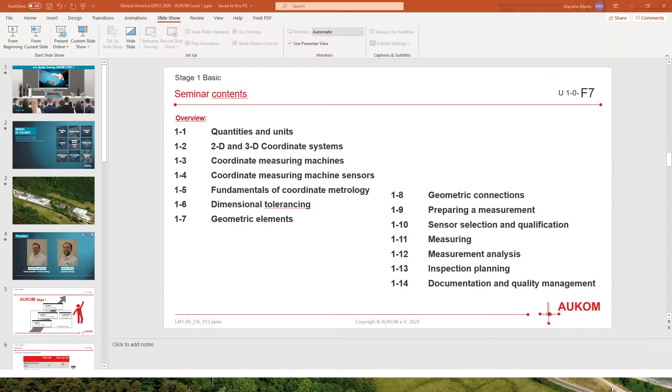Okay, here in this slide is probably the best shot of where our products are made. You can see in the different shapes, ceilings, which is a signature of how far we've come. As a family company, we pride ourselves on giving a personal touch to every customer. We make your challenges our challenges, so that your success is our success. We have recently celebrated our 50th anniversary, and we are looking forward to the next 50 years.

As I said before, my name is Jonah DeLongchamp, and I joined the Wenzel America team as an application engineer in August of 2009 until January of this year, when I took over my new role as product specialist for portable metrology for the NAFTA region. And today I'm joined by my colleague, Mariano Marks, and now I'll turn it over to Mariano to begin. Hello, everyone. As Jonah said, my name is Mariano Marks, and I am the application manager at Wenzel America. I oversee trainings, demos, MSAs, many different hats I wear, and I have been part of the Wenzel team since September of 2016. So I actually just hit my 4-year anniversary, and I'm looking forward to many more.

So today I'd like to talk to you about what Aukom is all about, particularly to deliver a small training on a section of the Level 1 course. But before I do that, I wanted to let you know about how Aukom helps your quality department. So Aukom is a suite of courses designed for metrologists, production engineers, and even managers, and really anybody in the field of metrology to enhance their skill set through these 1-week training courses. This is going to help you do 3 things. It's going to help you reduce costs, it's going to help you minimize waste, and it's going to help you make effective decisions.

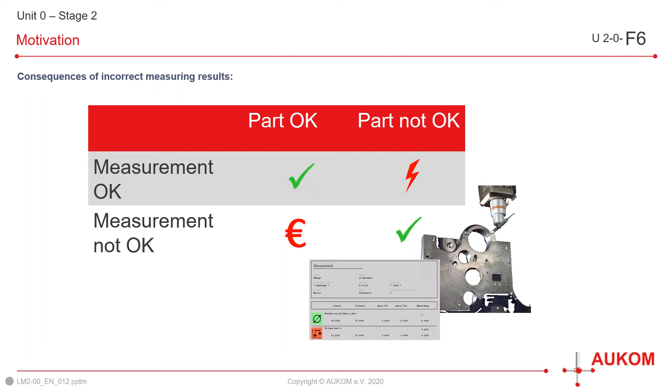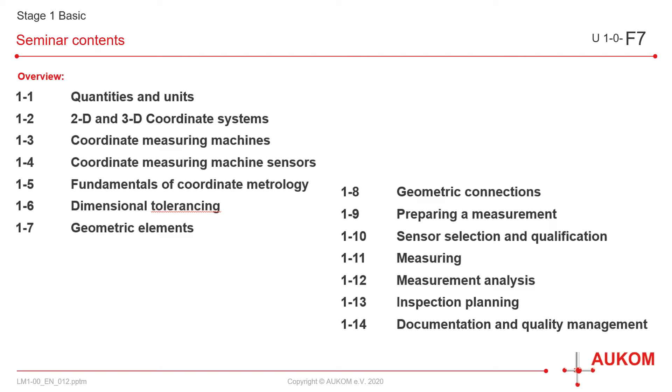So here are the topics that you'd find in the level 1 course. So we're starting off with the basics. We're talking software, tolerancing. We even work with some hand tools like gauges and calipers in the class. We look at software on CMM or any other inspection equipment that you have there at the facility, here or on site. So whether it's the first time you're seeing a CMM or you've been in the field for decades and would like to brush up on topics, this is a great place to start so that when you come across this, you'll know exactly what to do.

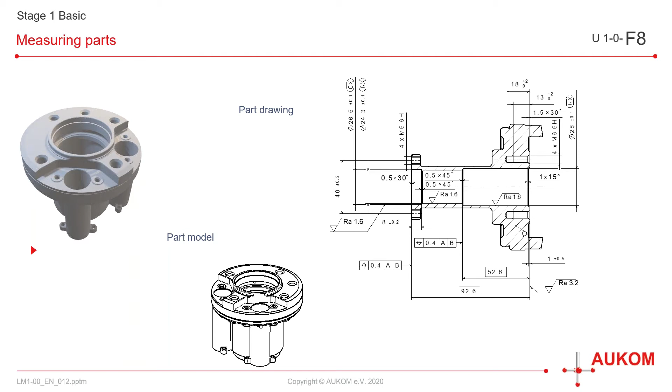So Mariano, you mentioned that there's an exam at the end of the course. Do you do anything to help your students prepare for this exam? Definitely, yeah. So we have end of unit questions at the end of each unit. We also have a practice exam that I hand out to the students in class for them to take overnight to study. And we also review before the exam itself as well, so that we can make sure you're successful come test day.

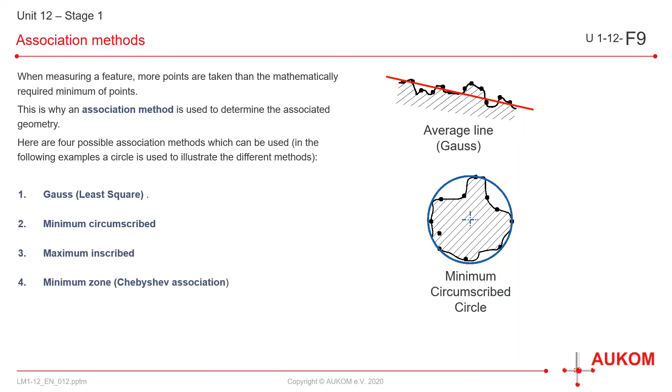So this association method is commonly used for the production process. You're churning out parts, you're measuring things quickly, you just want the average of your analysis. So, Mariano, when you say association method in Aukom terms, is this referred to what we call in Quartis as the evaluation method, or I've heard also this called in other softwares as fitting algorithms? Is this correct? You're exactly right, Jonah. So association method, compensation method, evaluation method, these are all interchangeable terms that you'll run across different softwares.

And this is a great example of how students enrich the class by bringing in their knowledge from different backgrounds and maybe softwares that they've come across. So that could be very important.

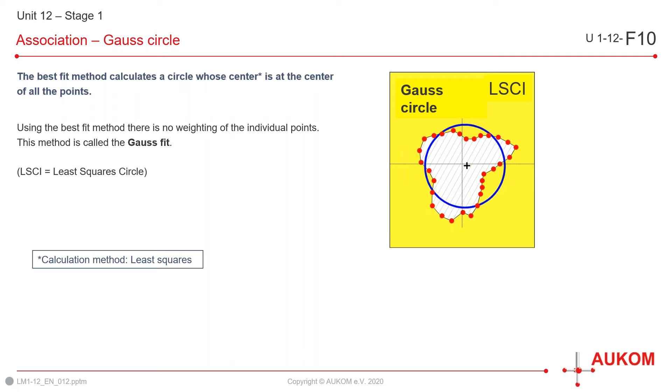So what you're saying is that even with the same data, the data point sets, you would still need to go a little step further and make sure that you're applying the right association method or fitting algorithm or analysis, correct? Right, yes. And so softwares like ours, Quartis, try to help you out by, for example, when you're measuring an element and you want to report the diameter, the software will already help you out by doing the correct association method for that circle, so maybe least squared. But when you're doing roundness, then it'll apply maybe a different association method, or for true position, and so on and so forth. Like the Chebyshev would be for roundness or form. Right? Exactly. Okay.

So to close up the least squared Gaussian association method, here we see that the assigned element is calculated using all of the measured points. So with all of the data that you get from your measurement equipment, it's going to average out using all of the data. We'll see why this is important in the next slide. So calculation is an averaging method. So since we're using all the data, outliers have very little impact on this calculation. So if you had outliers, a piece of dirt that throws one piece of data out, then the calculation is still relatively stable, right? If you had a bunch of kindergartners in the room and you had somebody who was 90 years old, the average age of the room is still relatively low.

And then it says a statement about the form deviation can only be made when a large number of equally spaced points are used. Right, so we don't want to really make a statement about the form or shape of your part if you've got maybe 10 points for holes that are around less than 50 millimeters maybe. So the size of the part even comes into play as well. So we want to be able to do our due diligence and make sure that we do have enough data when applying these association methods.

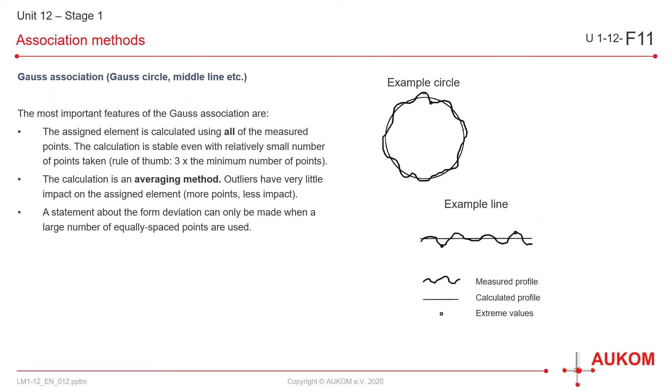And you can get more data from different sensors on your inspection equipment. As a CMM, as an example, you could put on a tactile probe or a tactile scanner if you want more data. Scanning would obviously get you more data. Tactile probes, you just drive up how many points you desire on that object. Exactly. You're doing helical scans with a Revo. You're gathering hundreds, even thousands of points a second. 6,000 points a second. That's right. Up to. Those fancy moves.

Okay. And so the next association method we have here is the minimum circumscribed circle. So for this association element, we have the same data, those same red points that you see here from our inspection equipment. What we're going to do is we're going to take, again, that perfect blue circle, and we're going to start shrinking all that data.

And we're going to make that blue circle as small as possible until I hit the outside 3 points.

So the other thing that you actually notice about these AUKOM courses is that it's manufacturer neutral. So this is the term that I like to use. So much so that actually in AUKOM level 1, we've taken out the images of the CMMs, the logos and things like that, and made them all just kind of like clip art and basic images, because again, the goal is to get that foundation of knowledge. We're just talking about the concepts in AUKOM.

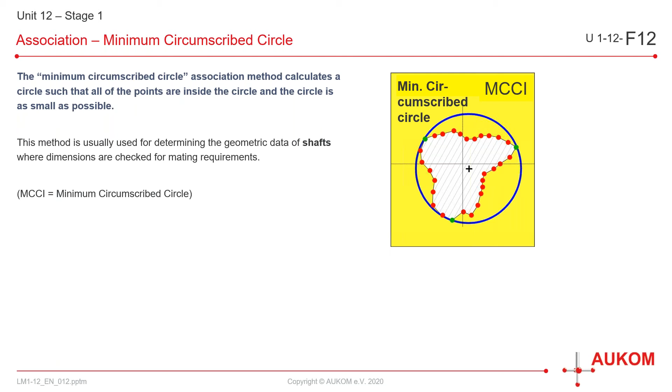So the next association method, conversely, is the maximum inscribed circle. So here, again, same red dots of data, taking that perfect blue circle and placing it inside all the data, and blowing it up as much as possible until we hit the innermost 3 points. So this association method, you'll notice for actually all of these circles, they're going to have not only different diameters, but different center points as well.

You're getting different circles. So Marian, it looks like this association method might be used for possibly a functional type check, a slip fit, possibly. Exactly, you got it. So for checking assemblability, if you've got that pin and the bore and you want to make sure they fit, you want to have the appropriate association method. So the pin will get the minimum circumscribed and the bore the maximum inscribed element.

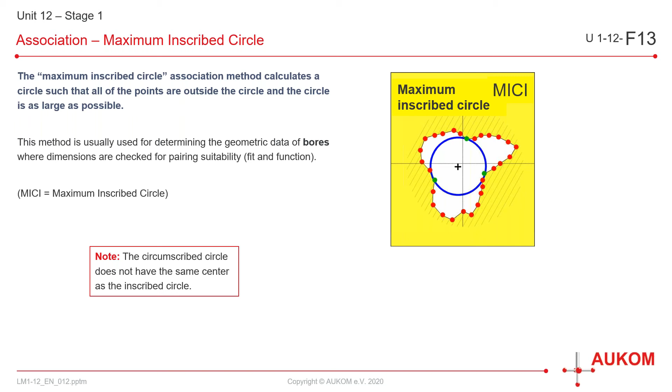So for these two association methods, as it says, this assigned element is calculated using the extreme points. So here, unlike the Gaussian, the outside points matter, those outliers, so we do want to make sure our part is always clean and set up correctly. We're going to be doing it with those extreme points when calculating these two circles as the image shows. So this assigned element is calculated using only a few points, the outermost or the innermost ones. And on the bottom right, you can see a visual of how it would work with a cylinder element.

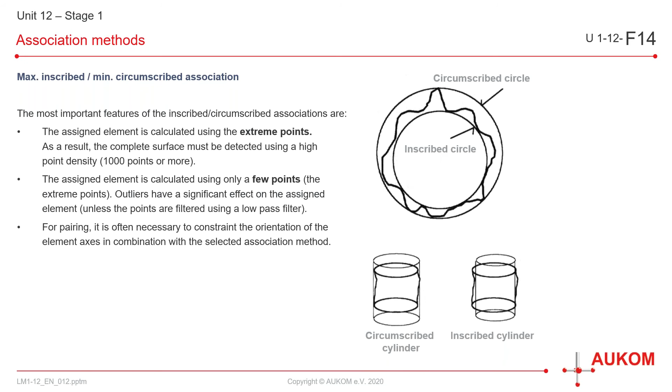So last but not least, we have the minimum zone circle, which is kind of a hybrid, if you want to think about it that way, between the Gaussian and the max inscribed, min circumscribed. So what we have here is the same red dots of data. And the way to calculate this minimum zone circle is by taking two concentric circles. They have the same center point. One's placed inside the data, the other one outside.

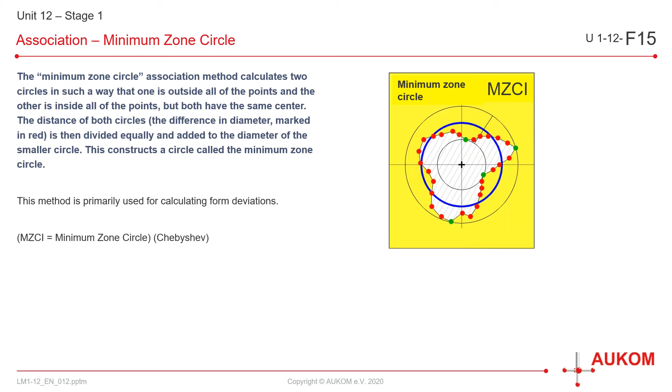We're going to blow up the inside one as much as possible, and shrink the outside one as much as possible, until they're as close together as possible. Then we're going to take the circle directly halfway in between, which is the blue one you see there. So here we end up again kind of like a Gauss circle, but it's just calculated differently. This association method, as Jonah mentioned earlier, is used when checking form.

So the Chebyshev association method, or minimum zone association method, is again also calculated using those extreme points. So your outliers are going to matter. So you want to make sure your part is clean and set up. Okay. So it is calculated using those few points.

So during class, one of my favorite things is when the students interact with each other, whether I'm teaching on site at one company or in the office with a mixed class. So this might be a point in the class where a student realizes their production process a little bit more and matches it up with the type of sensor they have. So if it is a scanning sensor, like we talked about, Jonah, they'll ask another student that also has a scanning sensor how they go about their inspection.

We might talk about speed, the type of styli they use, because they're all from different backgrounds. They have different machines, sensors, and they measure different parts with different materials, and they end up learning from each other. That makes great sense.

You know, I've trained a lot of different softwares over the years, and it would be a great thing for my students to have this AUKOM level 1 and the explanation about these different association methods prior to coming to class, because it saves a lot of time for me discussing these in a basic class.

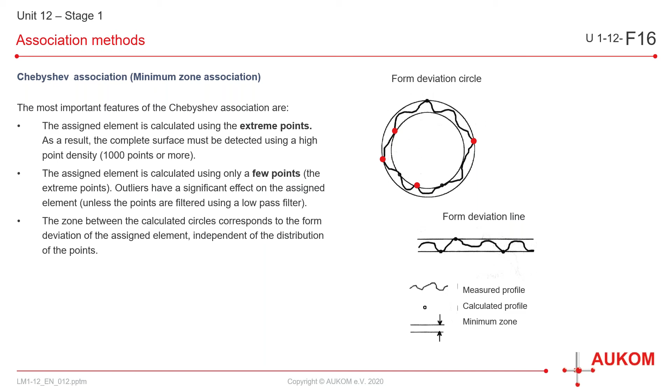And there is a separate course at the end for specific GD&T, only dedicated to GD&T, correct? Correct. And there we go over the difference between ISO and ASME, since ASME is mainly what is taught here in the US. And we go through each specific case to make sure you're applying it correctly in your software, and again, you're getting those correct results. And it's universal. Anybody can benefit from it throughout the whole world. That's exactly right.